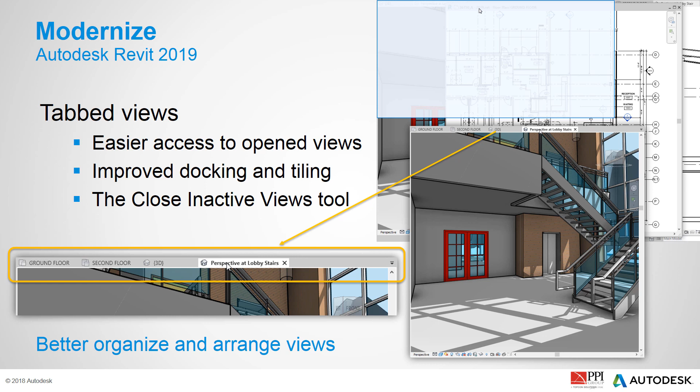First off, they finally introduced some tabbed views into Revit. So what that means is easier access to open your views, improved docking and tiling, and the close inactive views tool. So I'm going to get into Revit here, and I'll just open up my framing plans.

Essentially what you're going to see now is actual tabs. So I have my 3D view, but I also have my ground floor, and I can switch back and forth between these two. It's nice to be able to just switch back, but you can also take these off and dock them on the left or right portions of the screen, or leave them floating.

But you know what else is great about that? We finally have multi-monitor support. If I had another monitor, I'd be able to show that off, but essentially you can undock these and drag that view into your other monitors. So you don't have to grab that right portion of Revit and try to drag it over and kind of work around it.

I mean, that was annoying as crap. I know everybody here has done it. But you can undock those views now, drag them over, and you can cascade, tile your views in your other monitor. It will have full support, so you can just click over into them just like you're switching between your normal windows.

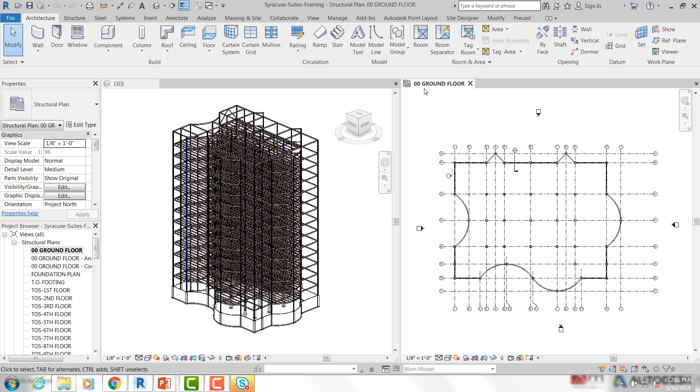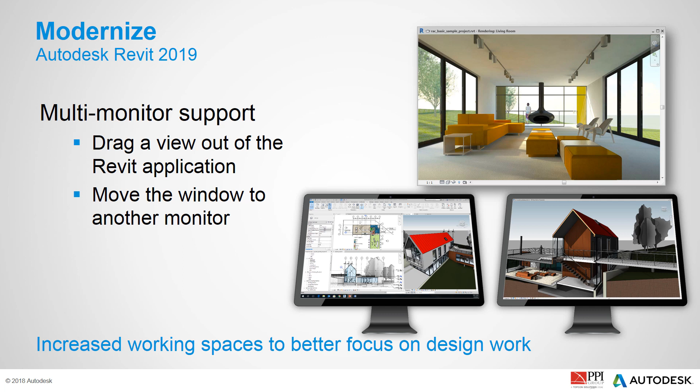We will have that. Let me get in here. Okay, there we go. But of course, right up here, if I dock this one back up over here, you're going to see that basically it was like the close inactive windows. It's going to look a little bit different, but it's the same kind of tool. It's going to do the same thing here for us. When we click on that, it's going to take away that inactive view that I wasn't using. So that's pretty impressive. I do like that they finally came around to that for 2019.

Now into the structure. For 2019, we have detailed steel design capabilities. So what that means is we finally have the ability to model with detailed parts, such as creating your own plates, bolts, and welds. You'll be able to specify and draw out your plates, specify their thickness, the positioning of your bolts, the sizes, everything like that, and actually create welds between your different elements. And then we have a full steel toolbar for actually modifying your steel elements, such as cutting and coping them. So I'll show it off here inside of Revit.

Now I'm going to go through this PowerPoint, guys. I'm going to show you what this can do, and then I'm going to actually model this a little bit inside of Revit to show you how some of these tools are working.

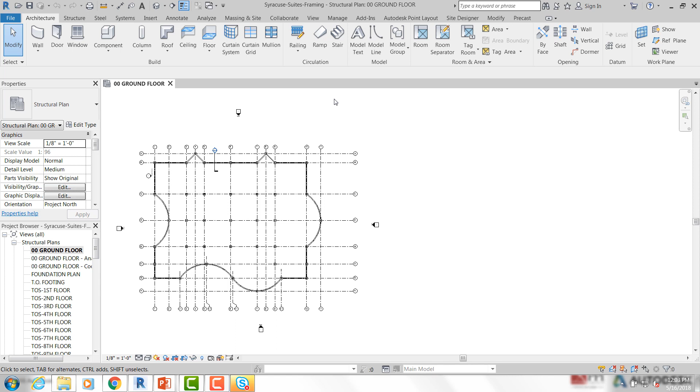Okay, I was having a heck of a time. I had to tell David last night I was staying up because I had an Autodesk issue. Who hasn't experienced those? But I had my Windows profile, for some reason, would not let me get into my structural connections and all these other tools, but I've got that worked out now, finally.

So I can't use my little control key there, but here's the steel toolbar right here. So that's a new add-in. And under that, you'll see, like last year, we had the structural connections right here, but they also integrated those into our actual steel connections. So you'll see we have the regular generic connections, and when we load them in, we have our other ones. Right here we have our new fabrication elements.

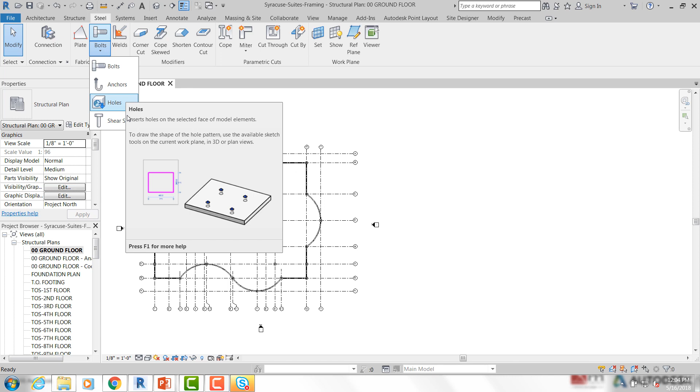So here's where we can specify our plate, our bolts. You'll see that we have bolts, anchor bolts, or you can specify your holes. We can specify the positioning, the thickness, and everything of our holes, and then actually place shear studs as well. And then welds. This feature is actually pretty awesome. You can specify the size of your weld. If you have, let's say, some hollow beams, and you want to weld them together, you can specify the gap between the two and then weld them together and specify your welds.

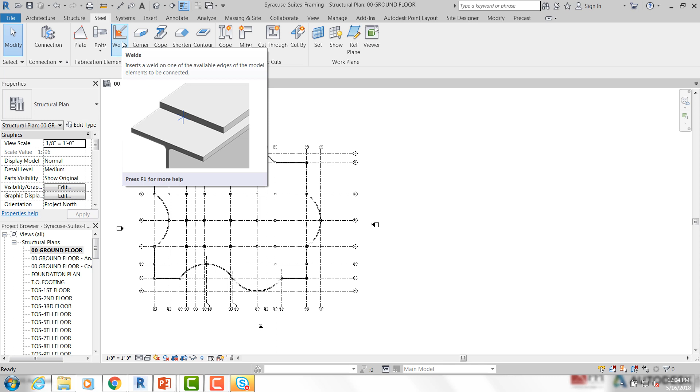Well, essentially, yes, it does. What it does is it joins them together and places a generic connection. So it connects them together, and it places a little box around it, and it'll actually be like one kind of connection. But I'll show you something a little different here in a second as well.

The modifiers - this is actually very nice. I don't know if a lot of you have worked with trying to place beams going into a column, or if you have any type of beam at an angle going up into another column or beam. You can actually specify if you want to cut or skew your columns and beams now, or different parts. We can corner cut, which may place a corner like a fillet on a plate, which is nice. But then actually you can skew your cope to adjust how they're landing on each other.

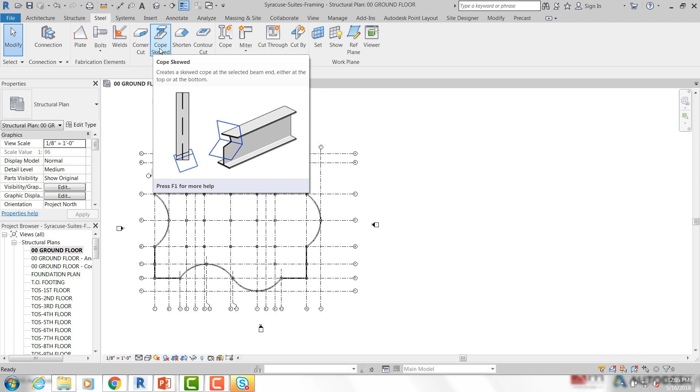So if you have bar joists and you're trying to place them onto the beam, you can essentially cope them and skew them and cut it so it sits just right on your beam. And then shorten - this is essentially like a trim or extend feature for beams and columns. So if you need to take it back off the face, like if you're going to place a plate on the face of a beam and want to give that space, you could use the shorten tool to specify that 1 inch or 2 inch gap for your plate.

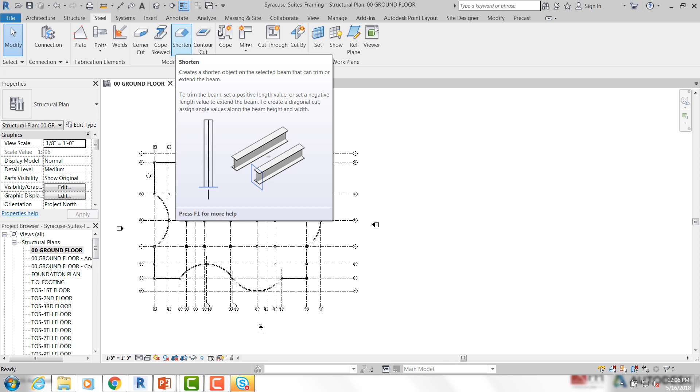And then an actual contour cut - so if you want to place a cut on the face of a beam or plate, this is what you would use, which is actually very nice.

And then our parametric cut tools - so we have our cope, miter. The coping tool is nice because, I don't know if a lot of you have worked with these before, but on the W-wide flanges, you're going to have your flanges on top, and in the center you want your web to carry forward and attach. A lot of times it was kind of difficult to specify that without having them overlap. There are plenty of workarounds, but now we have the ability to just click the two beams or columns you want to join together, and it will cope them automatically for you and create that connection.

And then our miters - with a miter, you have the ability to create an actual miter, a saw cut with the flange, and a saw cut with the web. So we can actually cut those according to how they intersect on other beams.

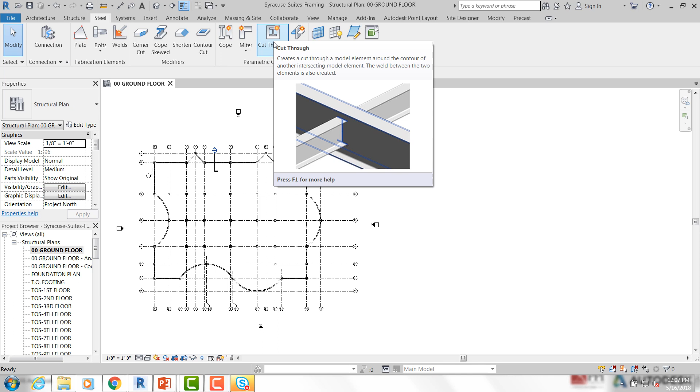The cut through, you're going to see, allows you to cut through a model element around the contour of another intersecting model element, and then it's going to automatically create a weld for you and place it between those two intersecting elements.

And then a cut by - maybe you want a beam to go through it. It's going to create a cut on a model element along the shape of another and then cut through the actual element. And then, of course, it's going to create a connection between those two elements.

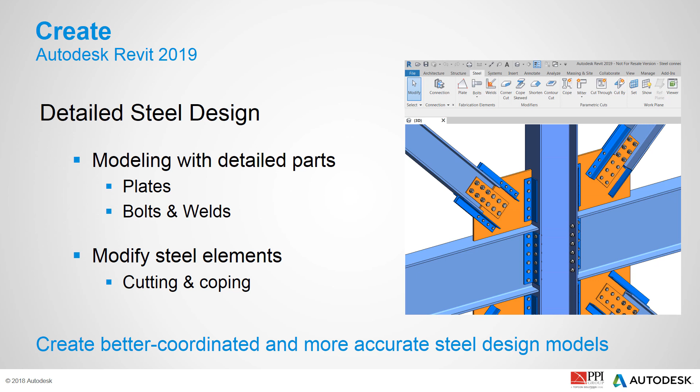So I'll get back into here. This is, of course, going to allow us to start creating more accurate steel design models. And what's great about this is as we start specifying our bolts, our plates, things like that, it allows you to tie into Advance Steel. So it seems like what they're trying to do now is tie Advance Steel into Revit for better structural designs, or more well-rounded designs. When you send your actual plates and bolts, you can create schedules off them. I'm going to show them in the next slide, but you can start specifying these elements and get a little bit easier to start manufacturing these parts.

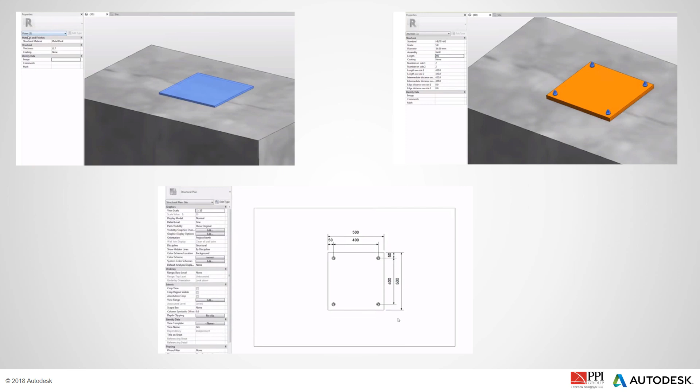It's an actual plate family, so we can go through and create other plates of different sizes, and tag those as well.

And then drawing your bolts in here, and we can dimension to those bolts. As well as here, I talked about the miters and the welds.

So, along with 2019—we had the ability to use our standard connections in 2018, which was pretty awesome. But the great thing about 2019 is you no longer have to have a structural connection add-in. It comes directly with the program, so there's no separate add-in you have to wait on and upload.

And they give us the ability to create custom connections. When I say that, I mean you go through placing your plates, you place your bolts, maybe you have some stiffeners, and you'd like to use that connection more than once. So now you can essentially create a group from those different elements—my bolt, my plate, all my stiffeners—connect them all together, join them, and make them a custom connection that you can save and use in other projects. You can copy and paste them or save them, kind of like a group, like you normally would.

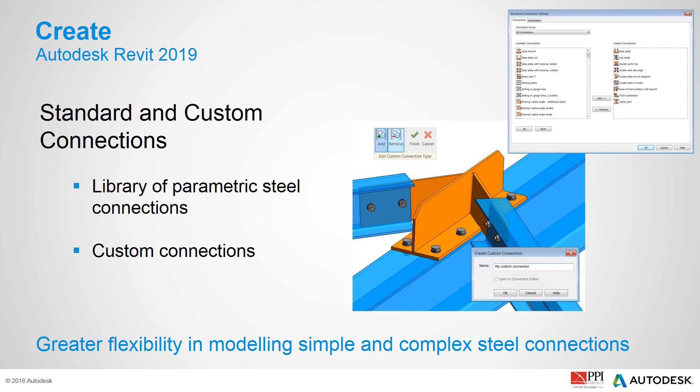And here, it's going to show you a few more pictures of ones I had drawn up. You're going to see that we have those bolts there, and we can grab that plate and then join them all together as a custom connection.

Now, along with all of this, they've given us the ability to document these steel designs. We can start making actual engineering drawings using dimensions and tags on our plates, on our bolts, everything. You can start specifying those, tagging it, and then of course creating actual bolt and plate schedules, which I think was pretty awesome.

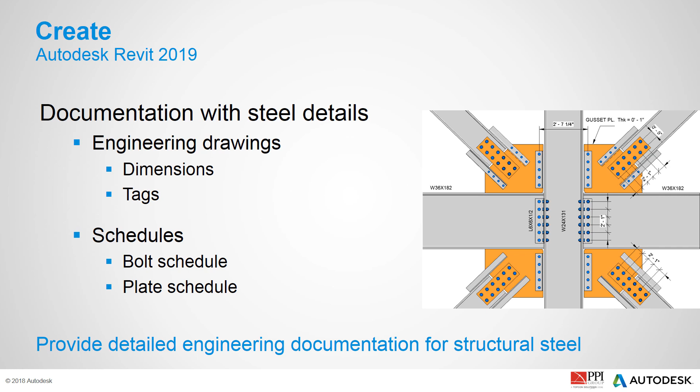And then the bolts and plate schedules are pretty much like any other schedule inside of Revit.

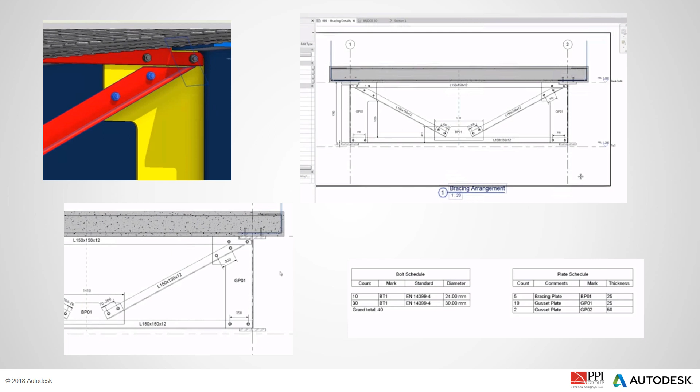They have also brought in a free-form rebar shape matching tool, so I'll be showing this one as well. They've finally given in to shape recognition as well as actual shape code assignment. So now instead of 0, 1, 2, 3, 4, you can actually see your different types of rebar, and it'll show up inside the properties browser, where you can specify the type or the number of rebar you want to use. That also enables schedules for fabrication, so we can start scheduling out our rebar for fabrication purposes, enhancing our 3D modeling and communication for fabrication instructions.

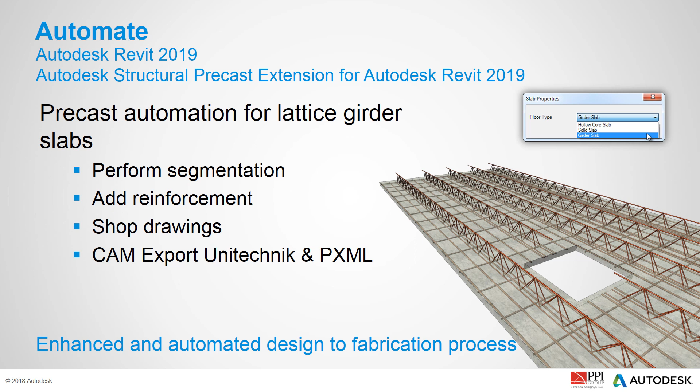Now for automation: we have the ability for precast automation in slabs or concrete walls. If you have an actual precast concrete slab or wall, you can specify the reinforcement you want inside it. You can split model elements, such as a full concrete wall, into actual precast items and specify the rebar, how they tie together, whether it's a hook end and you run rebar through, or whatever. Over there it's showing the slab properties - we have a hollow core slab, solid, or you can specify whether you want girders to run inside that concrete slab. You can also specify their offset from each other, the layout. And then they gave us a CAM export and PXML export.

Okay, let me go into here and start showing you guys some of this stuff. Let me get into this one here. There we go.

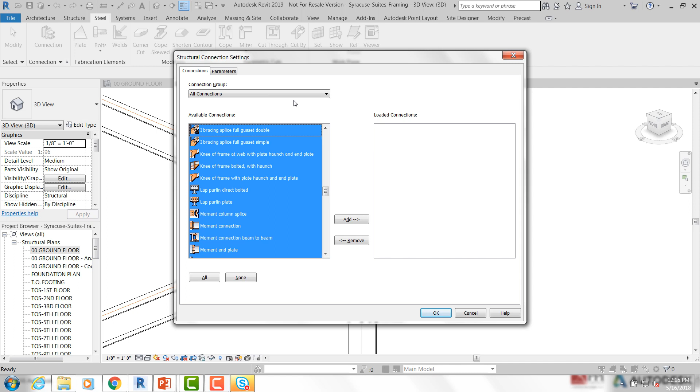So we'll see here that I have a few different columns, things like that. We just need to load our new connections. To load any of the custom connections, except for the generic ones, you need to go into the structural connection settings to bring them all in. There's almost 100 of them - quite a few different connections here. You'll see we have a large library of different types of connections, and again, we can customize these connections now - you could not do that in 2018. We can specify if you want to change the bolt patterns, things like that. So I'm going to go ahead and just bring these in. Of course, you wouldn't bring all of these in, but I'll go ahead and do it, say OK.

Now I can specify what type of connection I want to place here - it's probably going to be a moment connection. Actually, I'll go with moment end plate here. Specify my elements, enter. Now, to view these, we need to change our view settings, so of course you need to go into View. Since they've allowed us to see those different items, we start seeing it there. But as I go into wireframe, now I can completely see that actual connection - I can see my bolts, I can see how it places through.

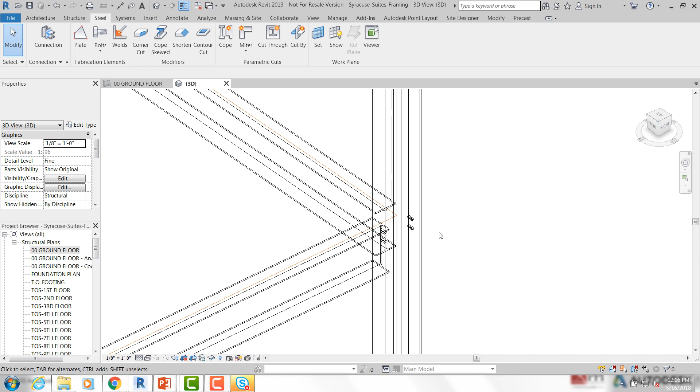So it cut through that beam there for me. And if I click on that little connection, I've got to get in a little bit tighter to it.

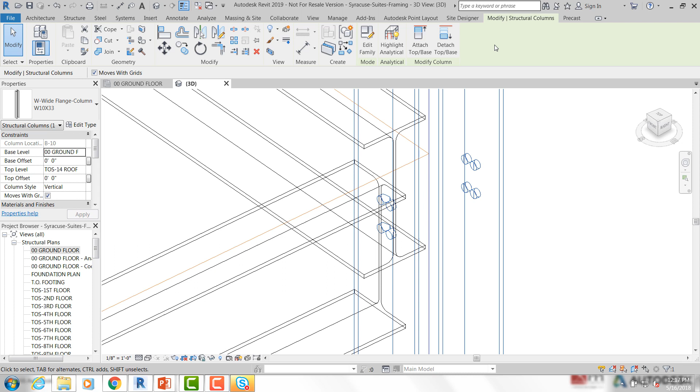Gosh dang it. Where is it? Where's my filter tool? Under Modify. Where's my filter tool? Sorry, I'm trying to find my filter tool here. They moved it. Yeah, that's what I was trying to do. It's not - it keeps wanting to switch to the column here. All right.

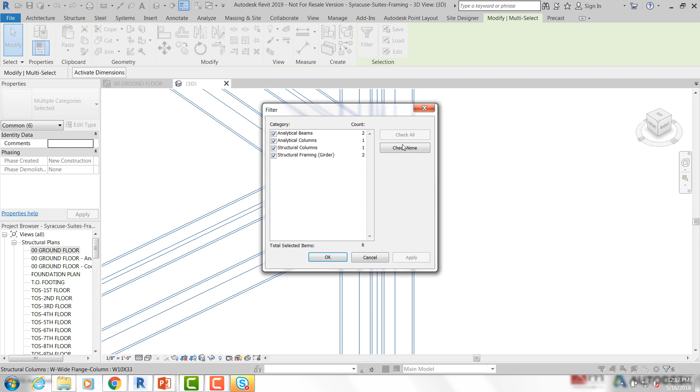There we go. All right, so I can find my structural framing. That's not pulling it - okay, maybe I'll try a different one. But anyways, so we can create those, right? And actually, I'm going to go ahead and open my project 2 here - this one will show it a little bit easier. So let me go into my 3D view here.

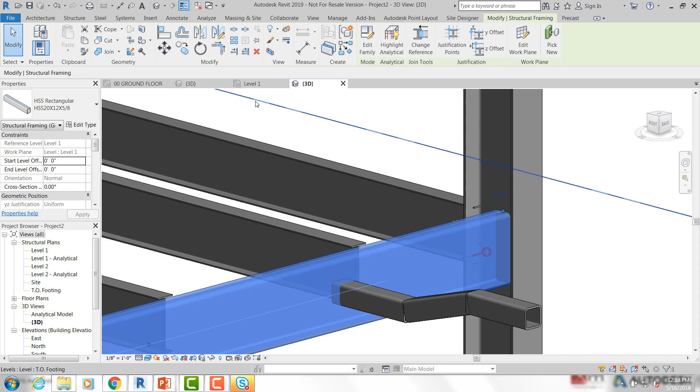Okay, if I want to specify how this maybe connects there - again, here's that steel column, the steel tab. So I can specify I want to weld them together, join them together, or cope or miter them. So I'll go ahead and maybe choose a miter here, my steel.

You will need to select both items and then essentially click Enter to activate them. Come on, just grab my beam. There we go.

Steel and miter. You'll see it's automatically going to join them together for me and cut it, right? And then it's going to show me this little box so I can edit the properties.

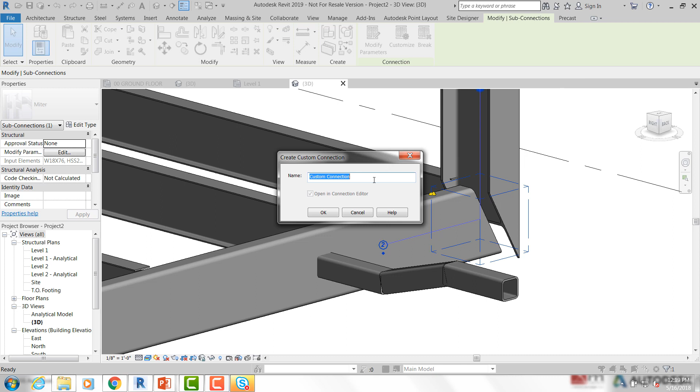So you'll see the new connection options here are break. If you want to break that connection, here's where we can customize that connection. This is how you start creating that custom connection, okay? We would customize it, select our other options or items to add into this connection.

I'm going to do that again here in a second. But I'm going to grab onto that miter and show you guys the modify parameters, where we would get into to specify that gap.

So we can put maybe a 3-inch gap, and then maybe specify, I can't type today, a 3-inch weld. So we can specify that, and then you'll see right inside of there, now we have essentially a weld miter symbol that it's going to give us to allow us to edit it further. You can also use a bisecting line, things like that.

Now, again with our connections, if I bring this back, I'm going to go ahead and miter these together. I'm going to weld them. I'll create a plate, some bolts, and then I'll show you guys how to essentially create a custom connection for it.

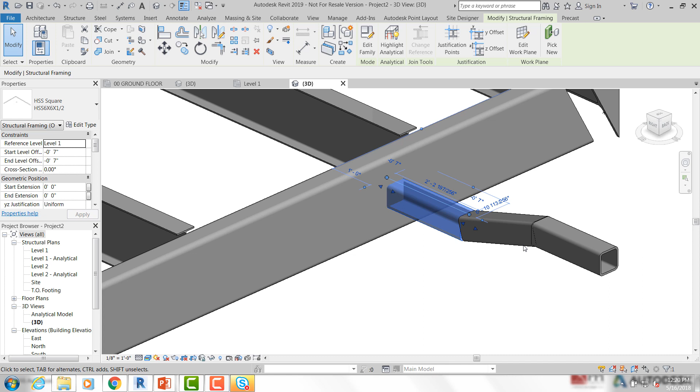So I'm going to go ahead, these two, go to miter, this one and that one, enter. All right, so we'll see it brought them together there for me. You see it joined them together there for me.

And then I can go ahead and modify that parameter, and this time maybe do a 2-inch gap and specify a 2-inch weld.

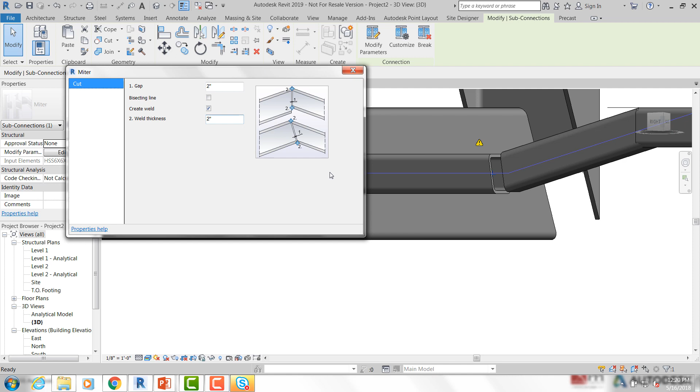And then we can go ahead, grab these two, steel, miter. And of course grab back in there.

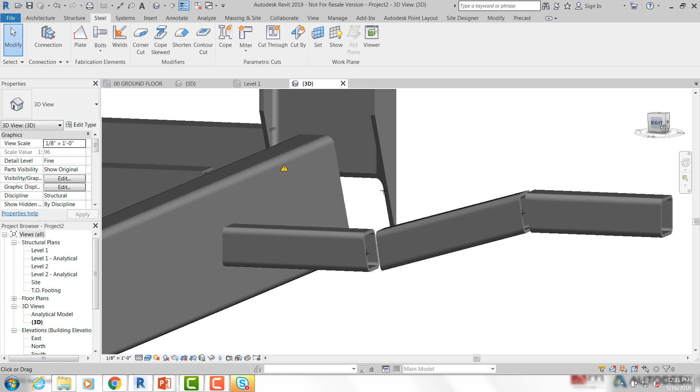You know what? I don't like that gap being that size, so maybe I'll change this one. But again, now we have these all joined together. At least these two items are essentially joined together with this miter, and then this option is joined together with this one here because of the miter.

Now you can, of course, take those gaps down and make them look like they're essentially right on top of each other. So if I grab back into here, there we go, modify. I can always go back and adjust that gap and adjust that weld at any point in time.

And it is keeping track of these welds for us, so we can schedule these welds now as well. Okay, so we can go through and schedule our welds.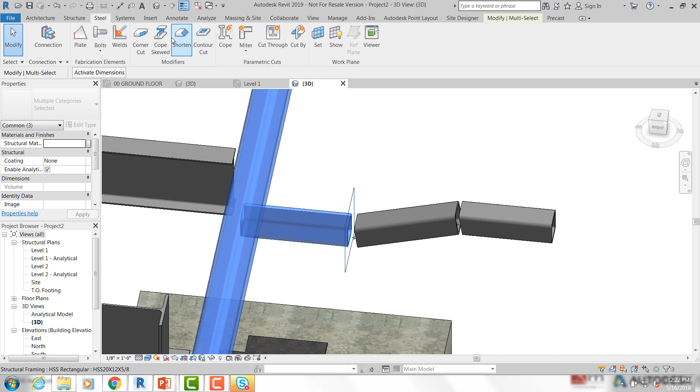So I'm going to go ahead and shorten this one here. I'm going to bring it back because I want to bring this here. So you've got to select your item and the item that you want to go off of, so you'll see it cut it there for me.

I'm going to go ahead and say that I want to bring that back. Let's go. That was way too much.

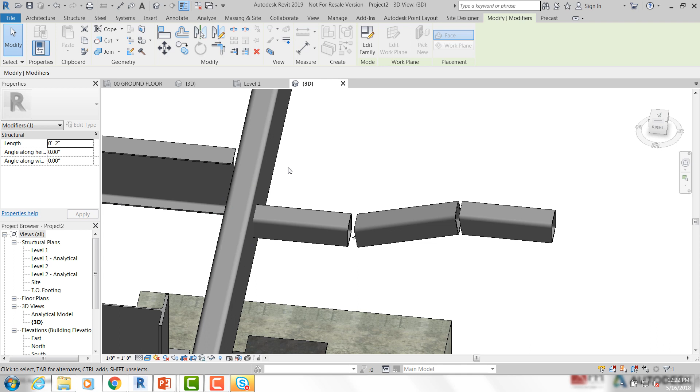You know what? I'm just going to make a 2-inch plate there. That's, well, let's make it like a 3. It's not giving it enough for me. That should be good. All right.

Now also, if I get into maybe my level 1, so I can go ahead and close out of these here. WT. Okay, so I can kind of see what I'm doing here.

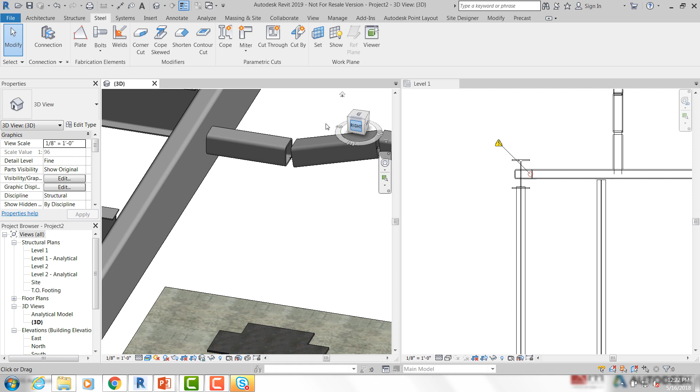And what's nice about this is it allows you to actually draw, so I'm going to click on this here. It actually is going to allow us to draw this plate in the 3D mode, right? And you'll see it's going to bring up my regular draw tools. I can also set my work plane if I need to.

If you are working at an angle or anything like that, you can specify your work plane. I'm going to go ahead and draw this.

Okay, something like that. There we go, a little bit off.

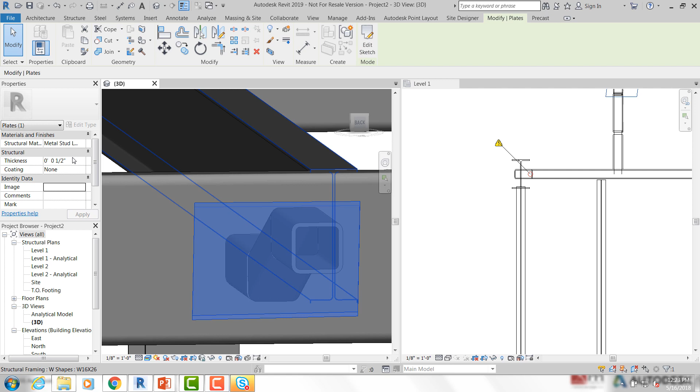Okay, you say okay, and then now we can go ahead and specify the thickness of it. Now I do need to place that back on the face there.

Maybe I need to get into east elevation. No. I'm jumping all over the place, aren't I? There we go.

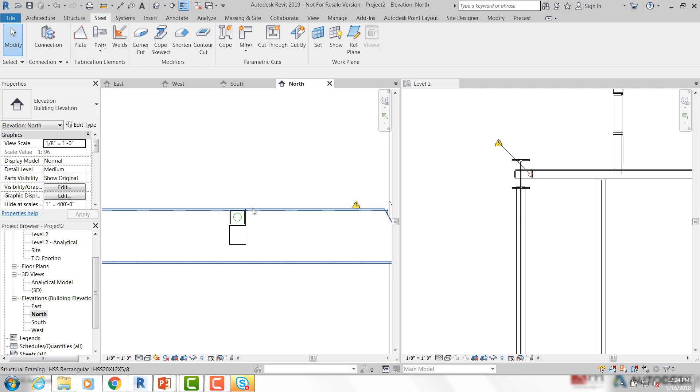So maybe I'll come in here, draw my plate. And of course, it wants me to go back into another view, the view that it makes sense in. It won't let me do it. All right.

Actually, let me set my work plane, pick my plane here.

Good Lord. I apologize, guys, this is being a little annoying here for me. Come on, just pick my plane. There we go.

There we go, finally. All right, so there I can specify that thickness. Maybe bring it out, apply 1 inch. And it put it back into my beam, didn't it? Yeah, it did.

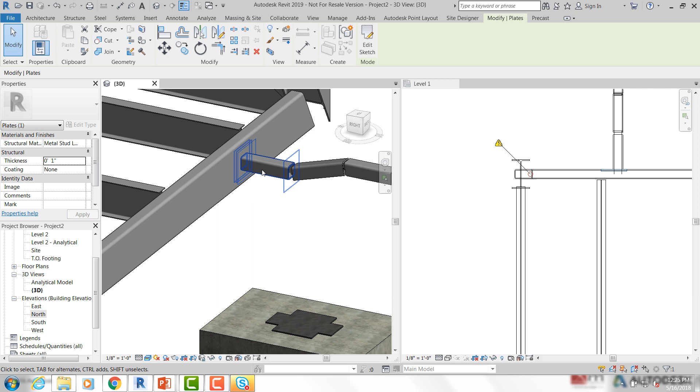Okay, you'll see my plate there. I need to bring it out to the face of my actual beam. I don't know why it didn't do that for me. Steel, shorten.

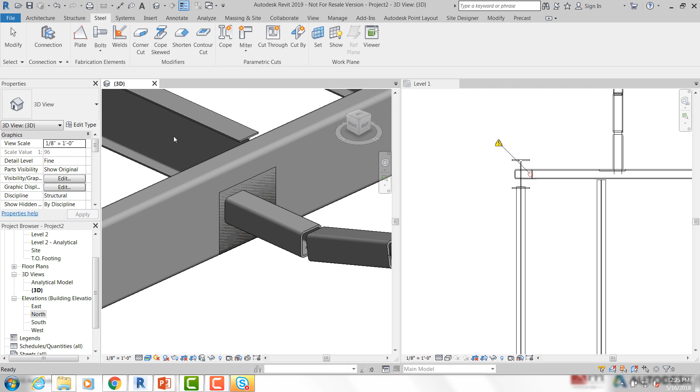Okay, anyways, so we can draw our plate out, and then for our bolts, what it's going to do is ask us to select a plate. Once you select that plate, it's going to bring up a box, essentially, for us to draw these in.

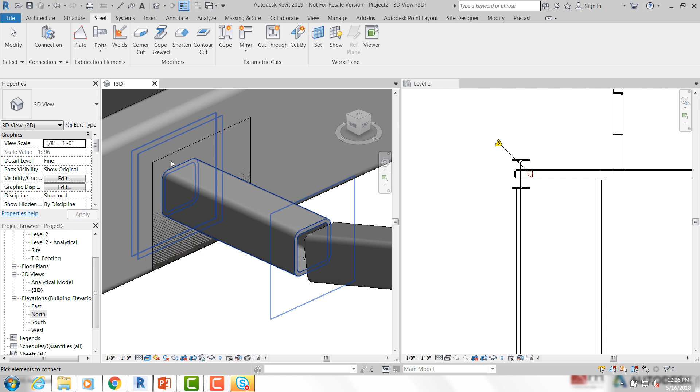Why are you not working here? Steel. You're going to place these right on the edge of your plate, and it's going to ask us to draw out a square, essentially, around our plate to specify the overall... why is this not working for me? Come on. Thank you. There we go, thank you.

So what you'll do is you'll specify an overall size here, or the outer layers of your bolt pattern. And there they go. Okay, so our bolts have been created. They've gone the thickness of our plate. They'll automatically drill the holes for us.

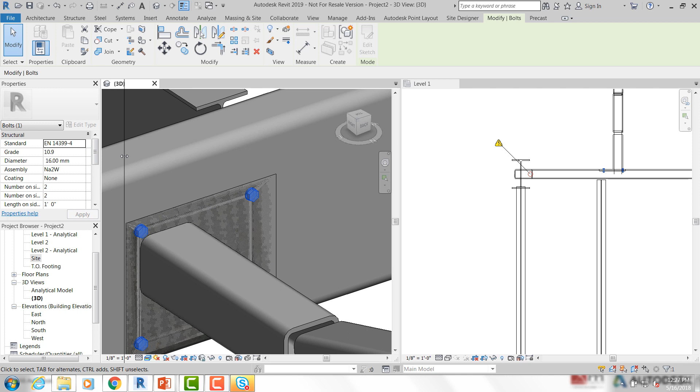And then you can come over here into the properties browser and see that we have our standard types of bolts. So you'll have an entire list of bolts here that we can use. You can change their grade, the diameter, their assembly, any type of coating, the numbers.

But I think one thing we'd want to make sure we're looking for is going to be this mark. Under the identity data there, if we can type in for our mark, that's going to allow us to tag these bolts and then schedule them. So I'm going to change these back down.

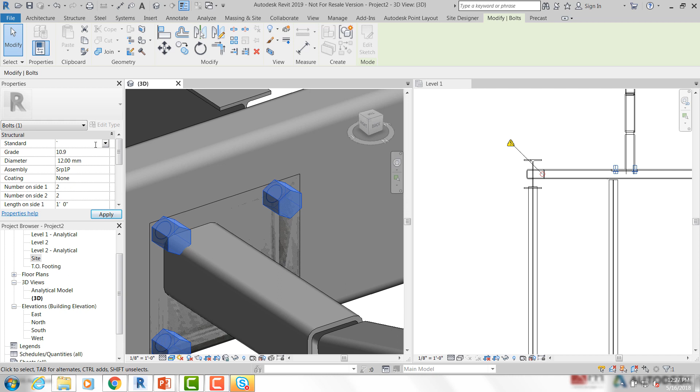Just do something like that. Oh, no. There we go. Okay.

All right, and then any type of weld is going to allow you to kind of connect these together. You can specify them, like I said, or create those together.

Now, when I go back to my connection, okay, and I have here, maybe I'll click these, go back to my connection. So again, to make a custom connection here, we have to first start out making a generic connection. Then add your items together to that connection to actually make it a new custom connection.

So I'll grab this, and then my beam here, if I can select it, there we go. Join those together, customize, and I'll just call this a custom connection. I'll go ahead and add this in here, and then add those, and maybe I want to go ahead and add my beams in. Okay, I'm going to say finish.

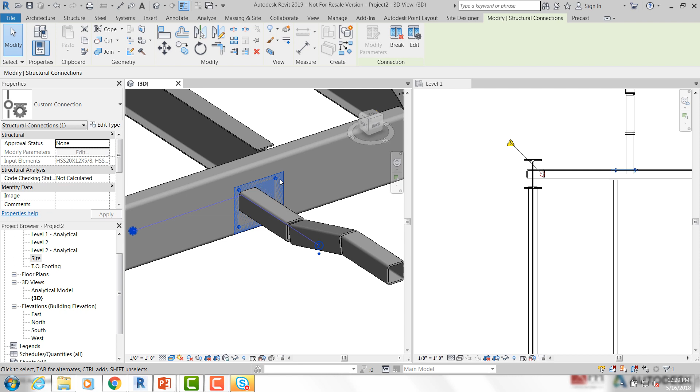So now you'll see when I select my plate, it comes together as one. So what I can do is do something like this now, and then hold down Control, grab my plate, my connection back here, and go ahead and copy and paste those elements down as one.

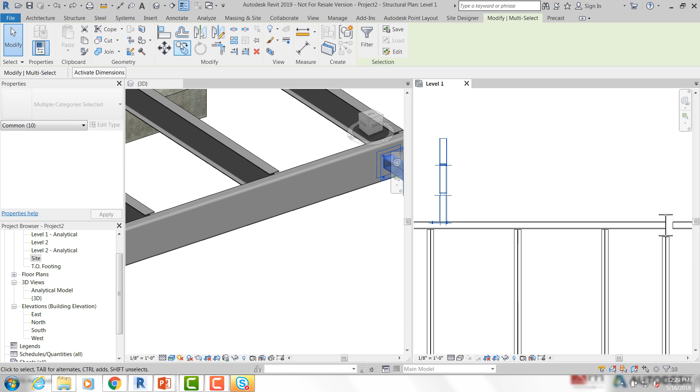Okay, so that's pretty easy. And of course, you can go through now, and if I come down to my schedules here, when I right-click down here, we're going to see the typical schedules, but we'll come down under the structural connections. So you'll see we have an actual structural connections category now.

And when we expand that, you're going to start seeing your anchors, bolts, plates, your profiles, shear studs, and welds. So if I wanted to, I could create a bolt schedule here. Sorry, let me move that out of my way.

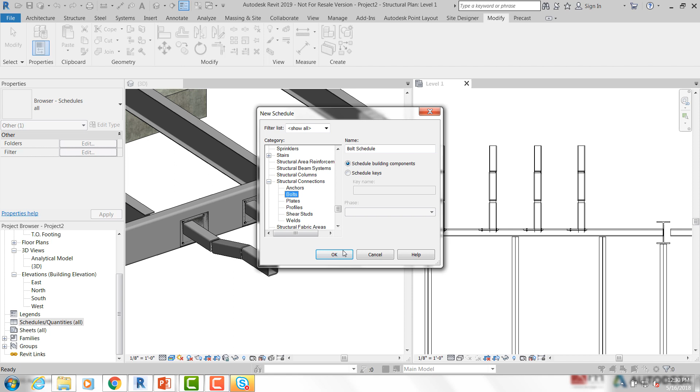Okay, and now specify your fields. So I can maybe go with count, make sure I grab my mark, and then grab my diameter. And then click OK, and here it is.

Since I didn't place any marks on them, it will show me here, but it's going to show these are essentially the different types of bolts that I have placed in here, okay?

And then I can come down, find my structural connections, there we go. Find my plate. And then again, I'm going to just use count, mark, place my thickness in there, and let's do comments. And there's our new plate schedule.

So this is nice for actually going through detailing those items, scheduling them, and then you can send them out to the actual fabricators, okay?

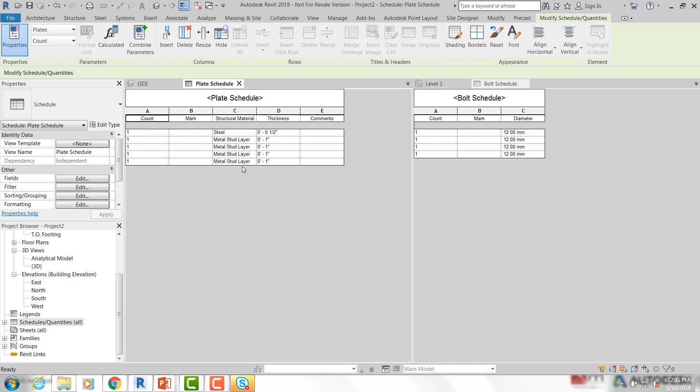Now, let me go back into my level 1 here. Okay. Gosh, I forgot where I was going. You know what, maybe I'll show that.

There's another, that's just another custom plate that I've drawn here to show kind of how you could take a column down, and it's any shape really. You can draw these plates and then specify your different bolt patterns, weld your column down to it, and create that connection, then copy and paste it all around your other footings. It really just takes a couple minutes to be able to draw these out.

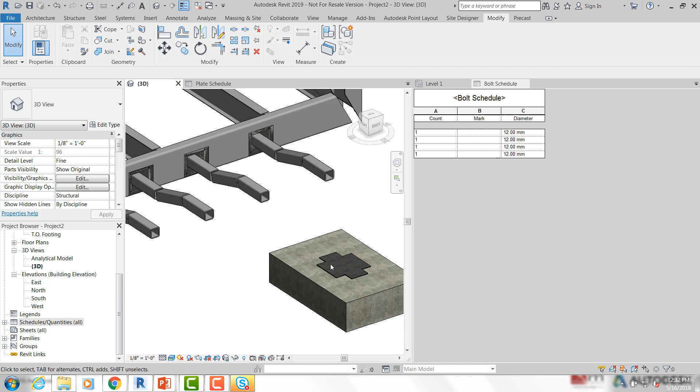You guys have any questions with those, with the custom connections or drawing the plates, bolts, anything like that? Yes?

Yes, you can. So if I come back into my level 1 view here... I'll use a framing elevation. Actually, no, a regular elevation is probably going to work better.

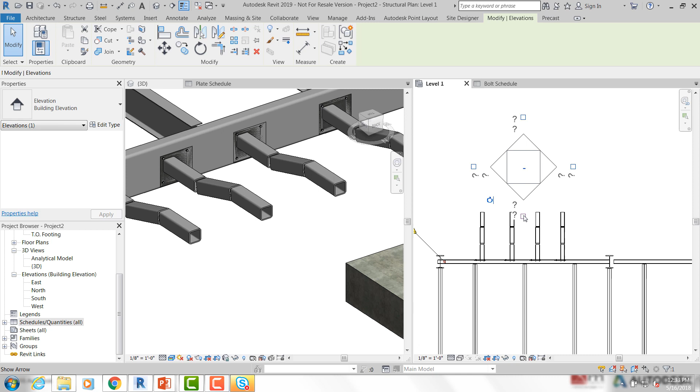Gosh dang it. Come on, there we go. Why am I not seeing any of my other options here? All right, let's just do it from here, see if I can.

It will allow me to actually dimension to the center points of your bolts if I'm in wireframe. You have to be in wireframe to dimension to the center points of your bolts and see the different bolts.

Grab my aligned dimension tool, and I can grab the center points of my bolts. Come on.

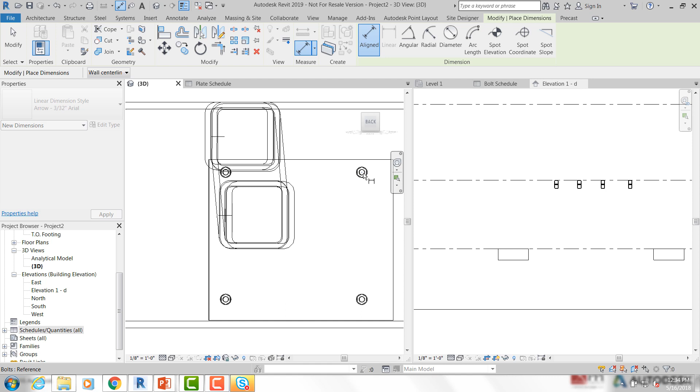Okay, so I can grab the center points of my bolts, and I can grab all of my different options inside of here and create the detailed drawings off of them. Honestly, it's going to be better to go through and create a detailed view or drafting view off of these, place a view inside of there, and then detail them out.

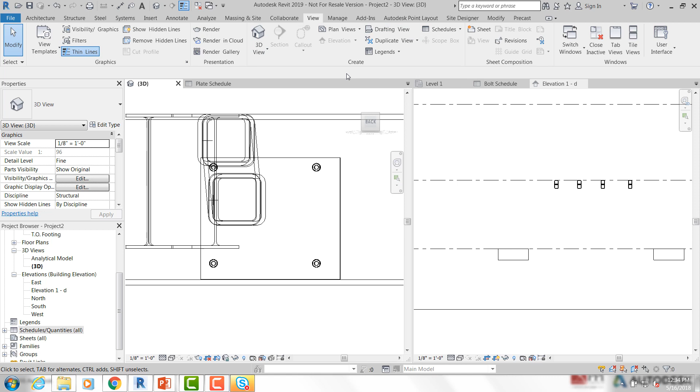And then, of course, we can now, if I go under Annotate here, find my tag by category. All right.

Maybe I'll just find them here then. Tag by category - you can actually tag your structural connections, but I wish I would have ungrouped these first, so let me break it. There we go, there we go. Annotate, tag by category.

Okay, so you're going to see that we can actually tag those individual items as well. We can tag our individual bolts, you can tag the plates, all the different items inside of your connection, but you do have to break them first. That's the only part that kind of sucks about it - you have to break your connection.

Did you have a question, or was that just? Okay. Anybody else have a question on those?

Yep. So is there a way to show thin lines? Oh yeah, thin lines are right up above, yes sir. Is that what you were at?

What's that? Oh, center lines. I'm sorry, I was having trouble hearing you. All right.

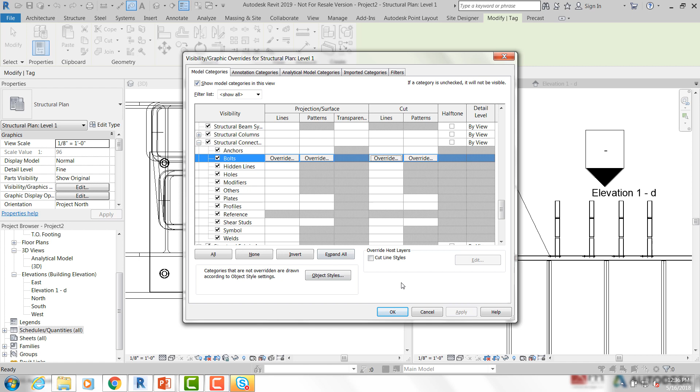Yeah, I believe so, it's going to be under the structural connections. I think we should be able to find settings for plates and bolts here so we can specify our different types. Well, that's going to be for the actual object styles and things like that, but under - where is that - line styles, line types, we should be able to find that. Where's that, manage? Line styles.

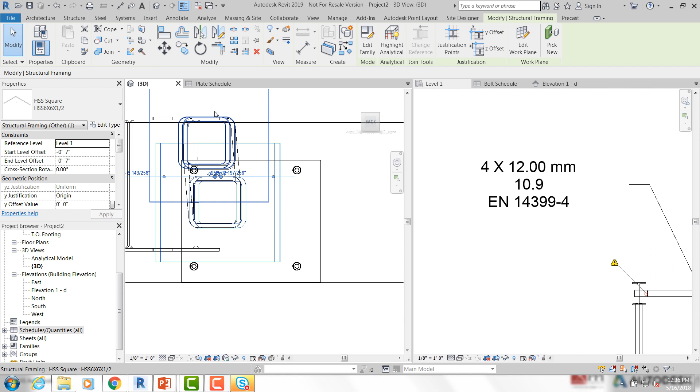I know these have center lines, that's how you dimension them, but you can turn them on or off. I think you go into line styles to turn that on and off, right? Oh, the actual center lines - you can't... yeah, let me see if I can get into this, I'm trying to see.

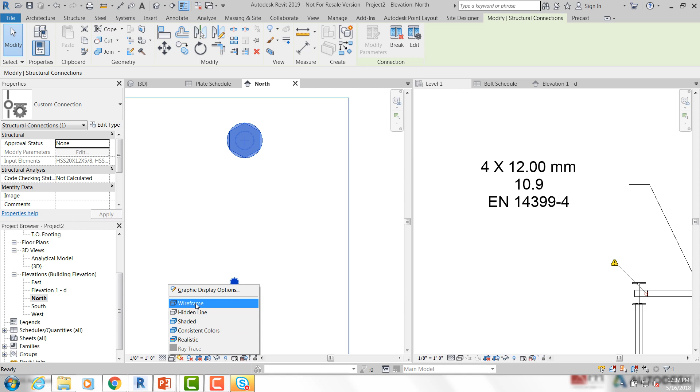The actual center point there, yeah, the actual center marker. There we go, Annotate, aligned. Yeah, there it is, it's giving us the reference point there, but it should actually be coming up. When I did this earlier, it came up with an actual center point to the bolts with the line.

I can also grab this one, essentially do something like this here.

Oh yeah, and find the actual - it might be under annotations.

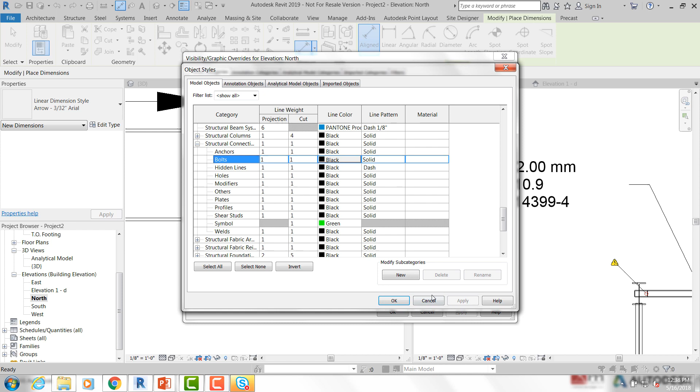You know, honestly, earlier I had it going for me, and I was able to dimension to those. I don't know, right here it's just going to show me that, right in the middle of my bolts. I'm not sure if maybe it's because that one's still grouped together. It's giving me the reference point there in the center, but not giving me my actual... okay.

But yes, it is - it will show you those center lines. I know I did this earlier, I don't know why it's not working for me now. Just typical Revit, I guess. Typical Revit, I can't... yeah.

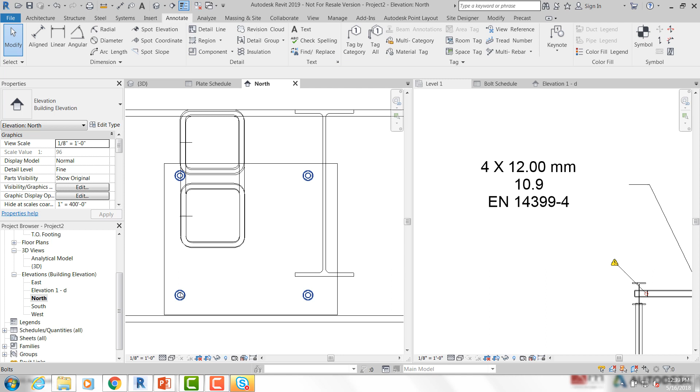Yeah, right. And what was the other question? Somebody else had one? No? Okay, all right, so let me go into my... get out of this.

Okay, let me bring up my other views here. I'm going to go into my structure, my concrete structure framing here. So we get into this, and we'll go into wireframe.

So when I go ahead to place my rebar here... there we go. Of course, it's going to bring up my rebar shape browser, but now you'll see that we have the actual schedule mark here and the shapes here, so we can specify those without going through and picking in our actual rebar shape browser.

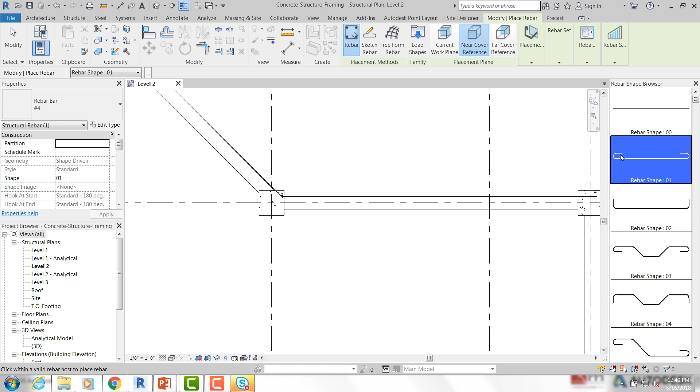So I need to essentially select something like that. I'm going to use rebar shape 1, near cover. Gosh dang, what just happened? Come here. There we go. Okay. But of course, now we can also go ahead and use the properties match.

Here we can match type properties and actually just create, like if I create another piece of rebar up here, I'll go ahead and use the same, or different, I'll grab a shape 3 here. That one might not work, but we'll see. Select my rebar down here.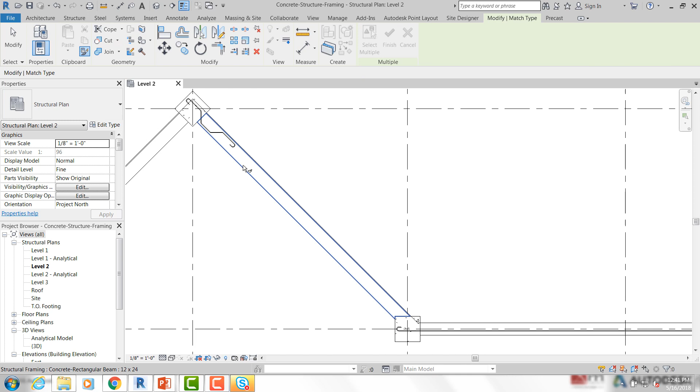Go ahead and match type properties. Select this one. It's going to go ahead and change it now. It changed it to be up and down for me. I don't know why, but it'll actually match the shape of your rebar now as well. So that's pretty nice. I don't know why it turned it there for me, or shortened it. Yeah, just shortened it, really. There we go. Go ahead and grab it there.

Okay, but again, in our properties browser here, you'll see we have that schedule mark, the shape, and then we can specify here. So this allows us to kind of adjust our actual rebar. You can specify that you want the hooked ends on them, and if you want a standard or 90 degree, anything like that.

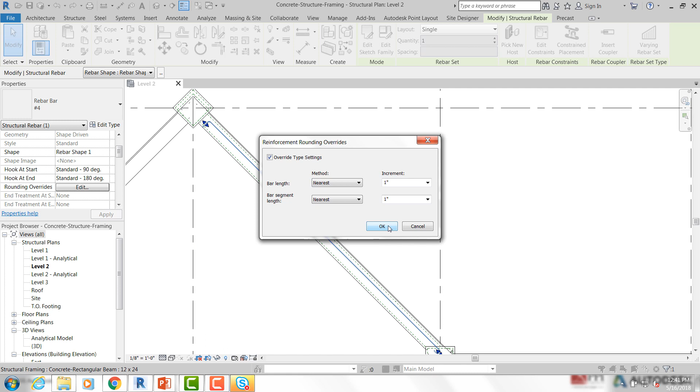And then any rounding overrides, so we have these actual rounding overrides where if you want to round the bar to the nearest increment, you can do that as well, which is very nice because nobody in the field wants to cut a bar to like a 16th of an inch. And then, of course, our visibility states, so we can actually start specifying where we want to view them as obscured or solid.

Now, before, you would typically, we had a PPI Revit briefcase, and you could actually go through and use our obscure or unobscure tool to make the rebar visible when you place it inside of a concrete wall. That's essentially what this is doing now. So you can say view unobscured, and what it's going to do is essentially gray out that concrete wall a little bit, and then it's going to go ahead and bring out the rebar, giving it that solid black line and making it stand out a little bit better for us.

Okay? Yes, ma'am. But if you were in really cold climates, you would have to have a certain amount of protection concrete on top of it. Yes, ma'am. So is there a way to make sure that it maintains that tolerance? Yeah, so essentially you're talking about like the offset from the face of the concrete to give it that 2 or 3 inches off the face.

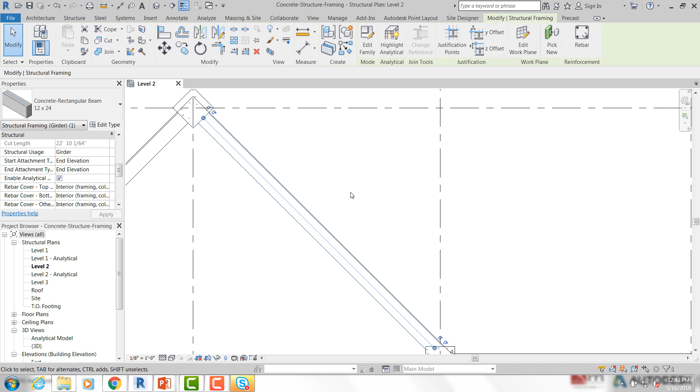Yeah, so on something like that, yes, I believe that we can specify that, but it's going to be in placement. No, where was that? It's free-form rebar here, but I can't remember where that was. Placement is parallel to the cover. No, that's the wrong one. Parallel to the work plane. You know what? We might not be able to. I thought there was where we could specify that offset there.

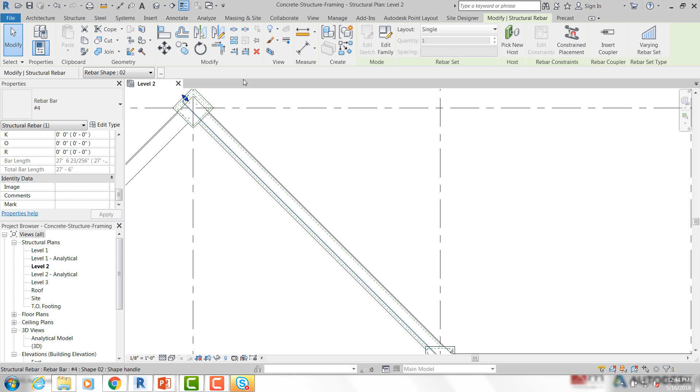What's that? Oh yeah, the parallel to cover. Yeah, that's right. So that's going to be the parallel to cover here. So that'll place it, I believe, perpendicular to it and be able to give you that.

Maybe if I do something like this here. See, it's going to actually show me those green lines there. Those are like a drawing alignment line. And it'll give me that offset there, and when I place it...

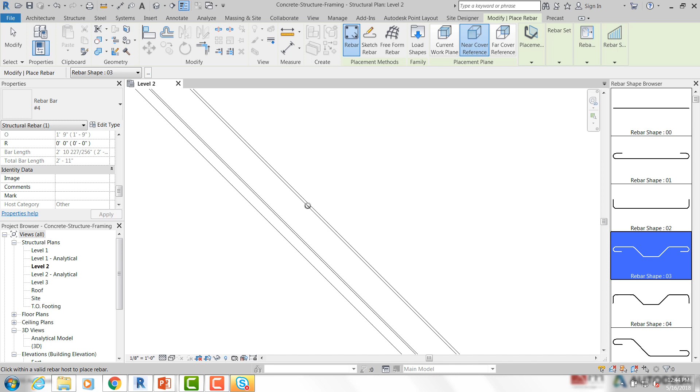Yeah, unless you use an actual rebar set, and then you can specify your alignment or your layout there as well. So we can go into the rebar set, and with my layout, I can choose fixed number, maximum spacing, all that kind of stuff, and then do a varying rebar set. If you have a different height of a wall, the height of your rebar or length of your rebar will vary by the height of that wall overall.

And then, let me go into my 3D view. We've got a few more minutes. Okay, so on something like this, I have a full concrete structure here, okay?

What I wanted to show you guys was this precast tab that we have now right here. You'll see that we can split our actual concrete, split the precast, and specify our different mounting parts or additional mounting parts to precast assemblies. We can also choose our reinforcement, and under reinforcement you can have an actual configuration, saving these configurations, and it's going to render and specify the guidelines for rendering these, like a custom fabric sheet that we can place, which again is just right here next door.

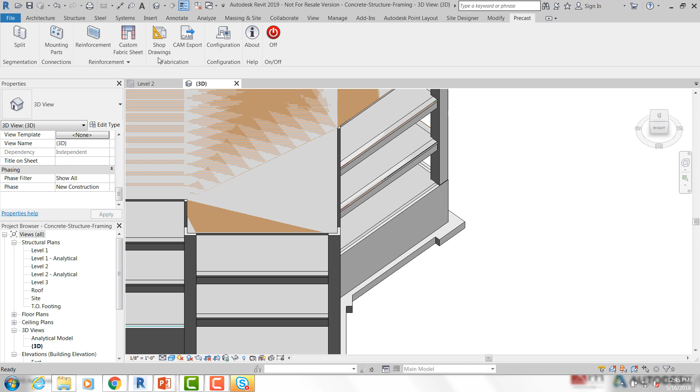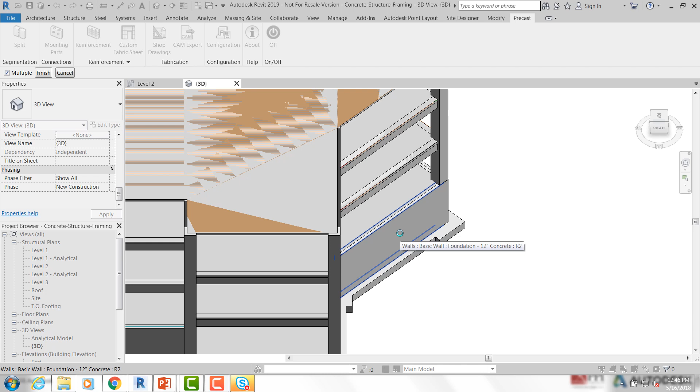But this actually is very cool, I really want to show this tool. So what it's going to do is synchronize all of these precast families essentially right into my project. Once I go through, I'm going to split one of these walls here and take it right into one of these shop drawings. I think this is pretty sweet because it transitions it right over and creates all of your views for you automatically. Now this will be an add-in - you guys would have to go to Autodesk, the desktop app, and you can find this add-in in there. So when I just hit finish, I'm going to split this, and you'll see that it's automatically going to place for me.

See, it's placed all my lifters in and split that block for me. If I go into my level 1, find that wall, change it into fine detail, go back up into wireframe - and there you go. So it'll show me, and I can go ahead and select my different part assemblies, and it did that for me automatically.

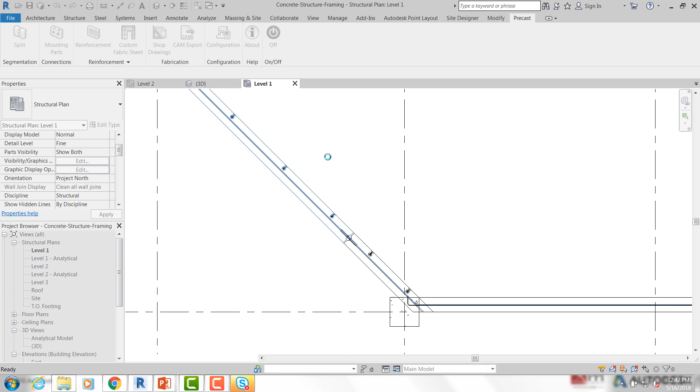Okay, now I can just go ahead and take a shop drawing of this item here. I'm going to say finish. It'll take a couple seconds, but it'll automatically create these for me, and I can transition through them.

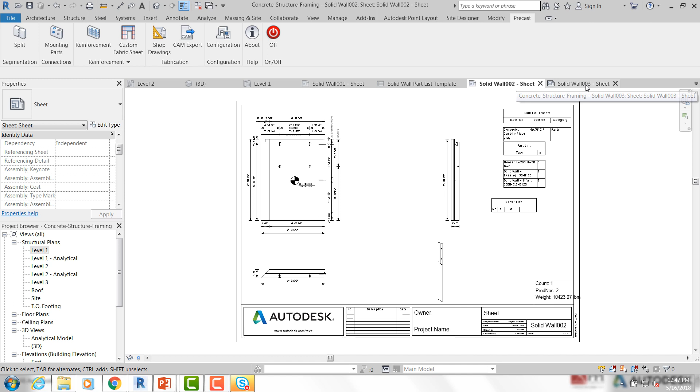You'll see here it's dimensioning out my wall for me completely, giving me all of my actual volume of the wall, my parts list here, my rebar if I did apply any rebar inside of it. And then it's actually created, of course, the solid wall, so it created a couple sheets for me because since I split that wall, it essentially created 2 precast elements. So it placed both of those onto sheets for me and created a part list, and then there's another sheet for the third part of that wall. It's going to go ahead and give me all that right off the bat.

Do you guys have any questions on these? No? Okay, well here real quick.

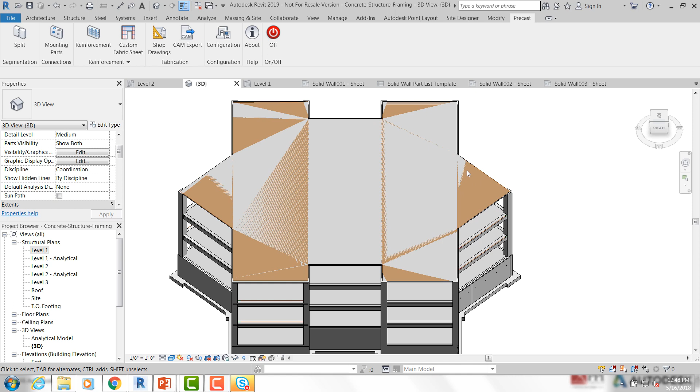So I talked about this one earlier again - here I'm going to go back to precast and split. If I split this floor, you'll see that it's going to give me a few different types: I have a solid slab, the hollow core slab, or the actual double tee slab. So I can say OK, and it's going to break these down into individual parts for me.

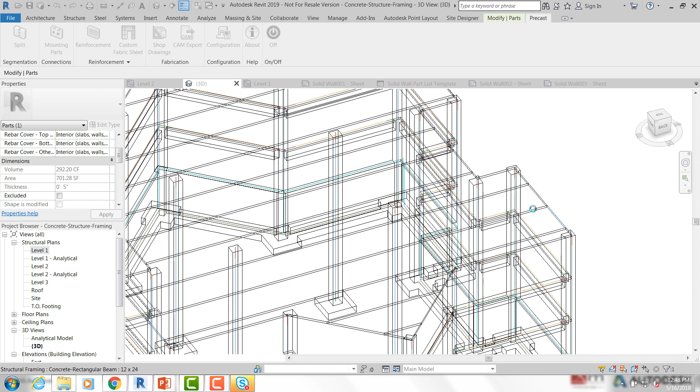And then when I go down into fine, I'll go into wireframe - oh, maybe not wireframe, yeah. You can see that it's split it out for us. And I can specify my rebar covers, and then if I want to, go precast reinforcement, specify the reinforcement that I want in my slab, whether I'm going to do a girder or whatever, and it places them for me automatically down the length of it.

Now, those are a little ridiculous, but you'll see it's so simple to do. I can just go reinforcement - maybe I'll go type 2 here. And it generates them for you automatically. These do have different properties here as well.

All right, so do you guys have any other questions? No? All right, yes sir.

The type of automated shop drawing shown for the precast - is there any similar functionality on the steel? Not as of yet that I've seen, unfortunately. That would be nice though, wouldn't it? Be able to go ahead and just label those all out for you automatically. That would be pretty awesome. But not yet - maybe let's see if they bring it in as an add-in.

Yes sir. Yeah, I mean, well, it's going to have some typical wood framing - you can specify the type of studs you want to use into your structural framing drawings, and actually do the stud layout and everything like that. But apart from that, no. You will find, I have found, several add-ins - yeah, they have the add-ins, but nothing default into Revit yet like that.